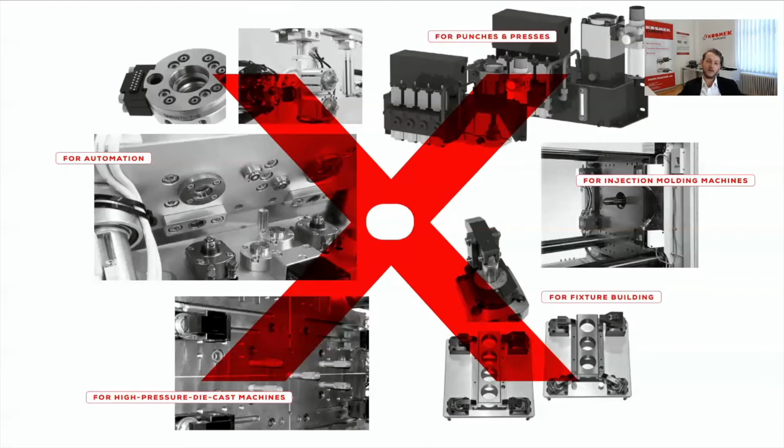For that, I want to start with a short overview of the different types and areas where the ejector couplers are used. So here we have a short overview regarding the injection molding area, ejector couplers and rods, and in terms of die casting. As you can see in the injection molding area, we have the possibility to use the ejector rods, and additionally, of course, the ejector couplers, which connect the ejector rods and the ejector platen. In addition to those two components, we have the center pullback, the PMD, which also connects the ejector plate to the couplers and to the rods.

In terms of the die casting area, we have two different ejector coupler types. We have the spring-loaded, air-released ejector coupler, the PMF, with an additional action confirmation sensor. And we have the manual ejector coupler, the PMG, which is connected and disconnected from the ejector plate just by pressing this little manual switch on the back.

So it enables us to standardize the process or operation steps with the help of these ejector couplers and ejector rods just by a simple button operation on the machine. So you can reduce the operation time as well as the complete cycle time due to a faster connection and disconnection. And everything can be accomplished by a simple button operation without the risk of getting injured or a malfunction inside of the machine.

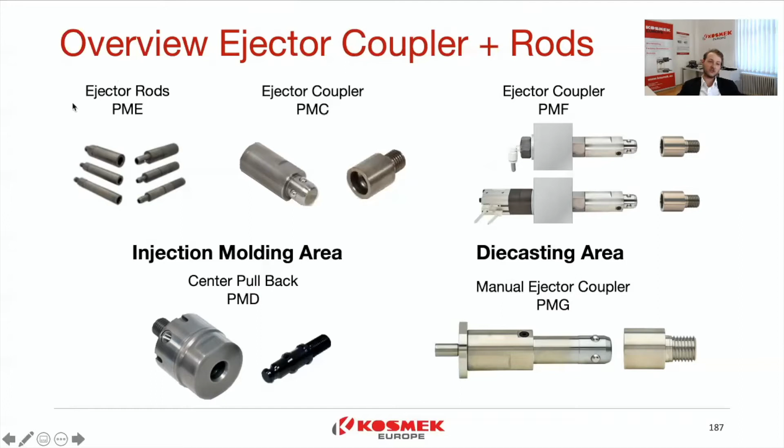And now let us start with the ejector rods, the PME for this webinar. The ejector rod itself has been divided into a base rod and an attachment rod. The reason for this is simplicity, ease of use, and speed when we are changing the ejector patterns. We don't need any more tools, which allows us to make changes in mere seconds.

The main benefits of using the PME manual ejector rods are that they are very easy to use. You just pull out the ejector rod and put it back in to arrange the new ejector pattern. There are no more tools required for changing the ejector patterns. And since they are light and safe, they are highly reliable due to the simple structure and the simple design of these manual ejector rods.

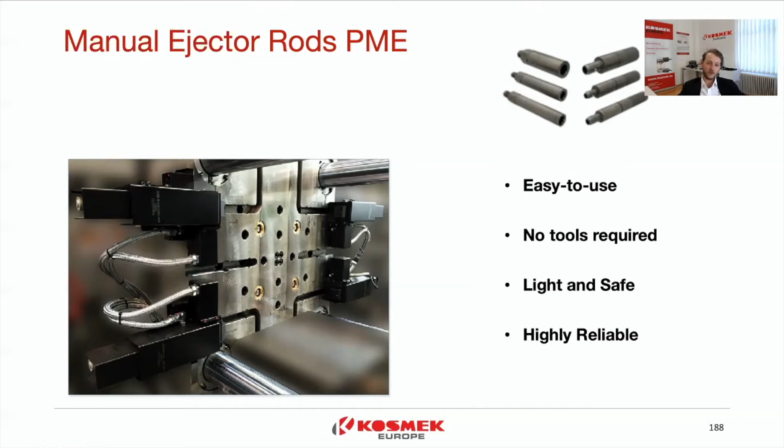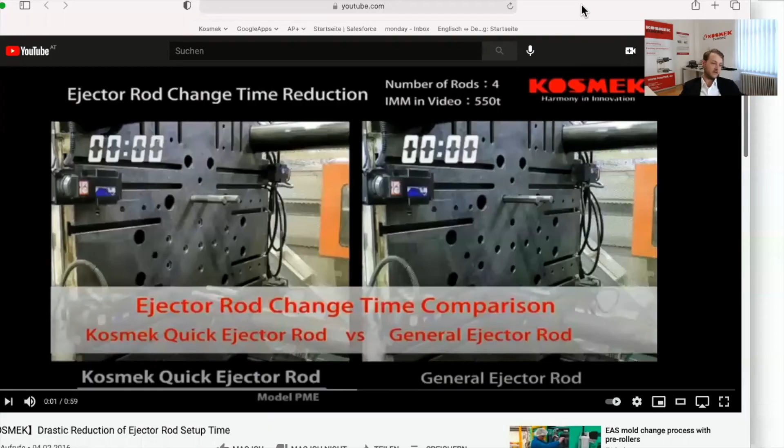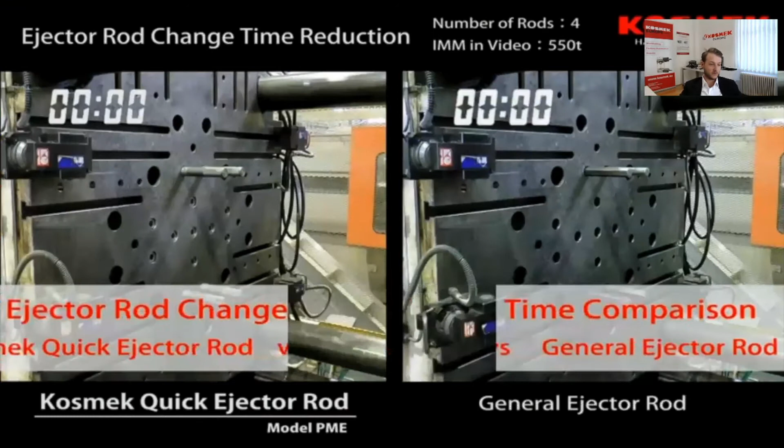And now let us have a look at this application example on how fast we are able to reduce the setup times, or the ejector rod pattern time, with the help of Kosmek ejector rods. You can see here the setup for this ejector rod change. As we have already started, we are seeing how fast the Kosmek quick ejector rod pattern is changed. We only need 7 seconds.

And as we can see on the other side, for a general rod, we need to unscrew it with the hex driver. Then we need to screw it out by hand. And once more, we need to lock it with the hex driver. So we need at least 2 minutes and 31 seconds to complete the ejector pattern setup, whereas you just need 10 seconds without any tools, which can be done with just a single-hand operation by your operator.

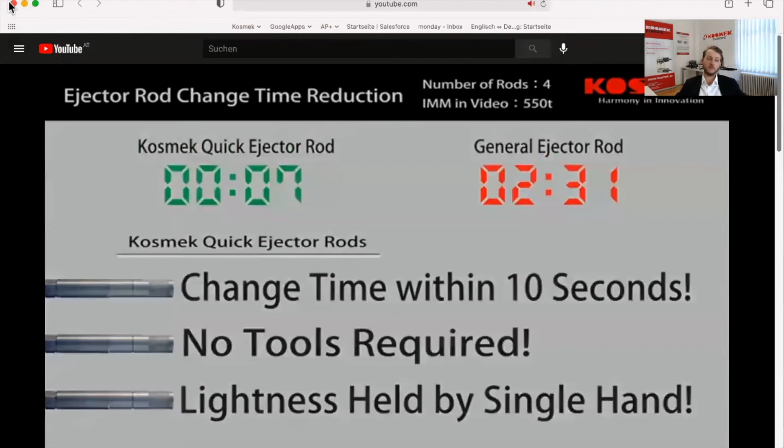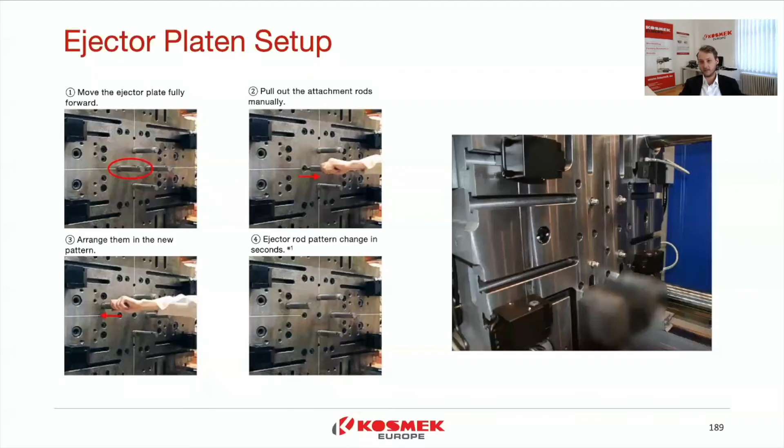Now coming back to the webinar. The reason we talked about the ejector rods first is because the ejector rods are connected by the ejector couplers to the ejector plate. So now we're coming to the ejector couplers, the PMCs for injection molding machines. It connects the ejector platen and the ejector rods just by a simple button operation.

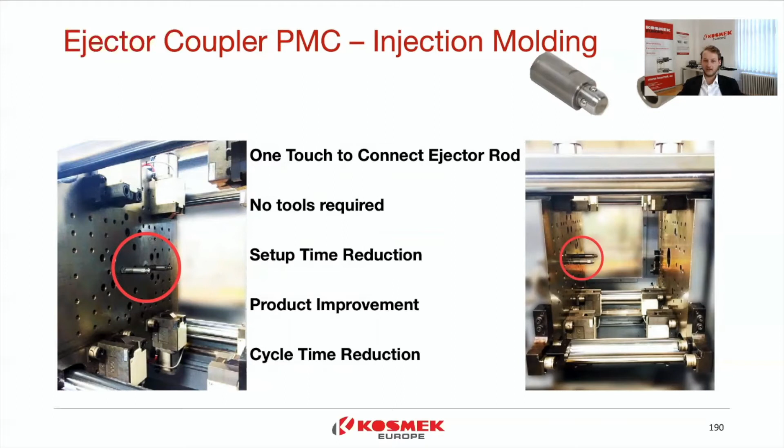We do not need any more tools to connect them, which results in setup time reduction and product improvement due to a more stable clamping of the ejector rods, which also results, of course, in cycle time reduction with the help of our ejector couplers. For the ejector couplers, I want to have a short look at our website and go a little bit more into detail on how the Kosmek website works.

So here we can see the landing page of the ejector couplers, and how we get to this landing page. Let's start in the home menu of the Kosmek website. Here you can search by keyword. You just type in PMC. Here you have the result for it. Click on it, and we are in the product information page.

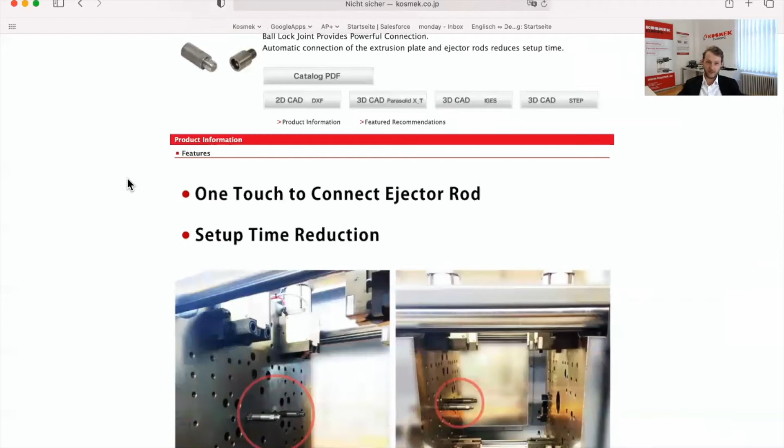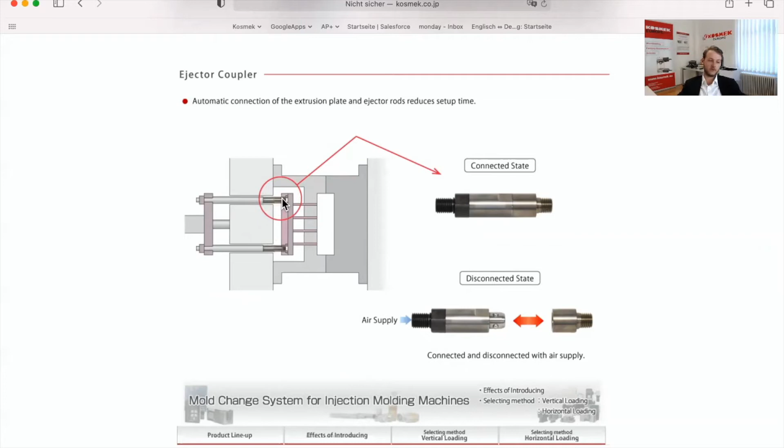So once more, we have one touch to connect the ejector rods to the couplers, which results in a setup time reduction. Here you can see the automatic connection of the couplers, which are mounted here. And here is the ejector plate and the ejector rods, which are connected just by simply coming together. And for that, let us have a quick look at the catalog, which we can just open here on our website.

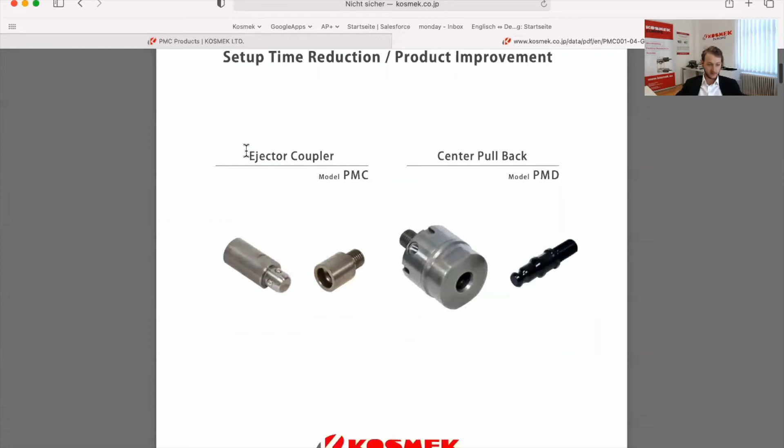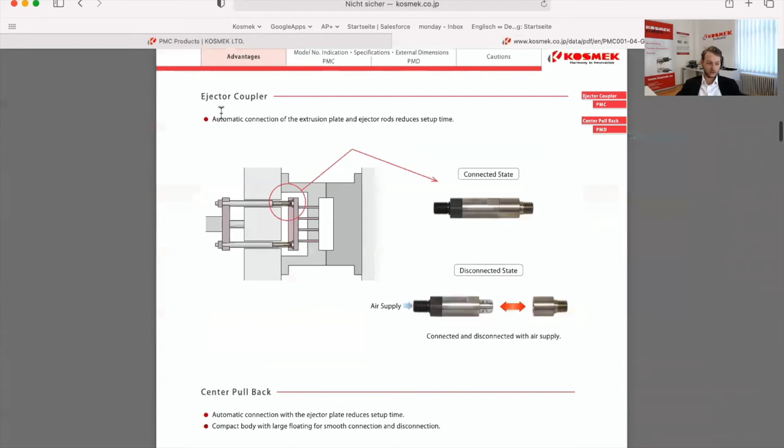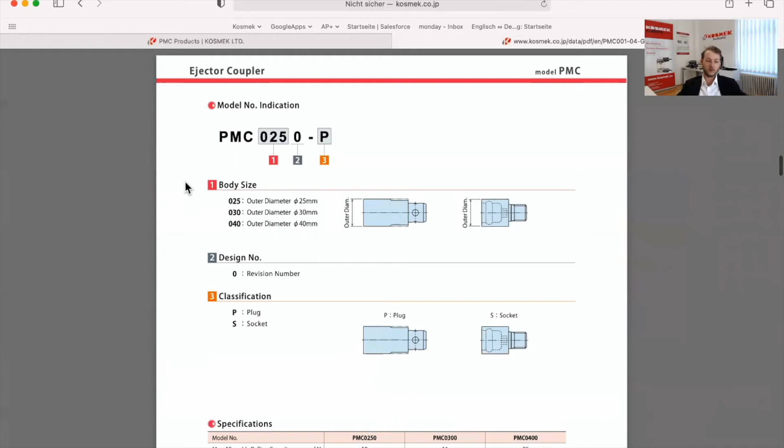So, ejector couplers and center pullback. Center pullback we will cover after this little check of the catalogs. Let me make it a bit smaller. So here you can see the catalog page for our injection molding ejector couplers and the center pullback. We're able to check here the different parts, the different connection methods, the different benefits these products can offer. And here we can see the right model number indication for these components, some external dimensions of these components,

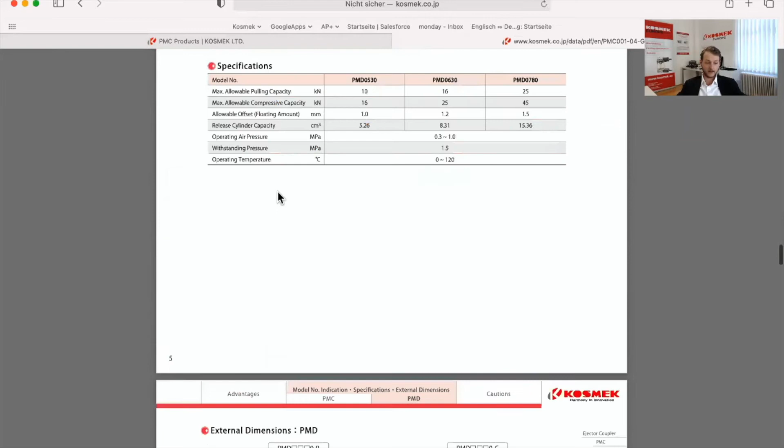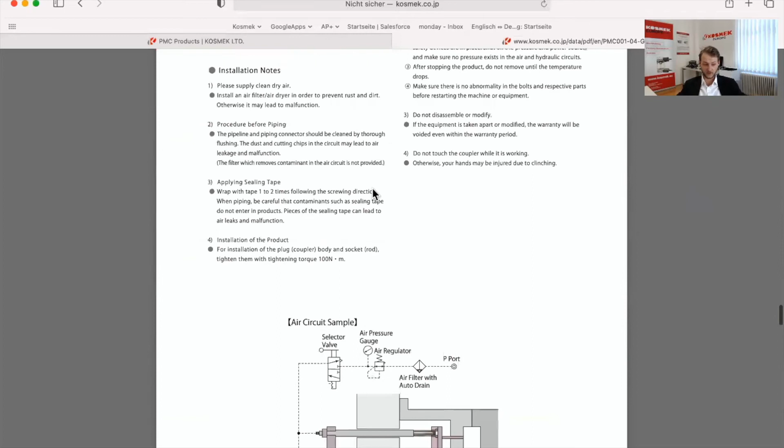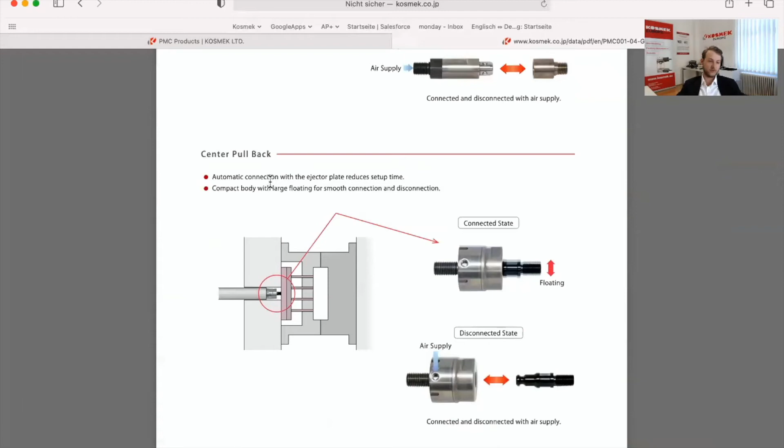which accessories are available, and of course some information on how to work with them, how to do the maintenance, and how the warranty works. All that you can simply check on our website, and you find everything basically in the catalog itself. And if you need help with the right model number indication, please feel free to come to us and we will check together with you the right specification for your ejector couplers, or in this case, center pullback.

And for the center pullback, let us have a short introduction to this product. It is used to automatically connect to the ejector plate or extrusion plate, which allows you to reduce the setup times drastically. The compact body enables you to reduce additional weight, and plus with the floating function of the component, we are able to smoothly connect and disconnect the extrusion plates, the ejector couplers, and the ejector rods.

The smooth floating function also enables you to overcome slight tolerance changes, so that no malfunction or damage is happening while we are connecting the ejector plates and ejector rods. This means you are more free when designing the ejector plate, or the C plate in terms of die casting machines.

So which type is floating? When we are in a connected state, you can see here the pull bolt, which is connected to the center pullback main body. This pull bolt is attached to the ejector plate. Once we are connecting the ejector plate to the center pullback, we have a slight floating function which allows us to overcome slight tolerance changes, and with that we are able to smoothly connect or unconnect the ejector plates.

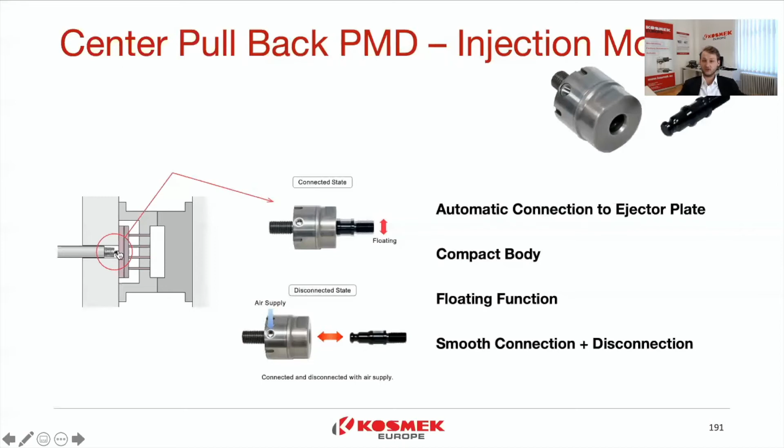And for the center pullback, we also have already seen the catalog and how we get to the catalog based on our website. Now we want to change to the die casting area, and first with the ejector couplers, the PMF. So once more, we divided these parts into two parts, the main body and the plug or socket side, as we call it.

This type is released by air pressure and is getting locked by a spring. This means when supplying pressure, the steel balls, which we can see here, go back inside the main body and can move freely since the piston is getting pushed back.

When we are back in the position, so we are on top of this and are right at the time to connect these couplers, we stop supplying the pressure to the release port, and the internal spring pushes the piston forth, and therefore the steel balls are getting pushed out and pushed inside of this tapered or straight surface.

So once more, the benefits are it is easy to use. We do not need any more tools for changing. It is light and safe. Due to the simple structure, it is highly reliable, and we are able to use a single button operation outside of the machine for connecting and unconnecting.

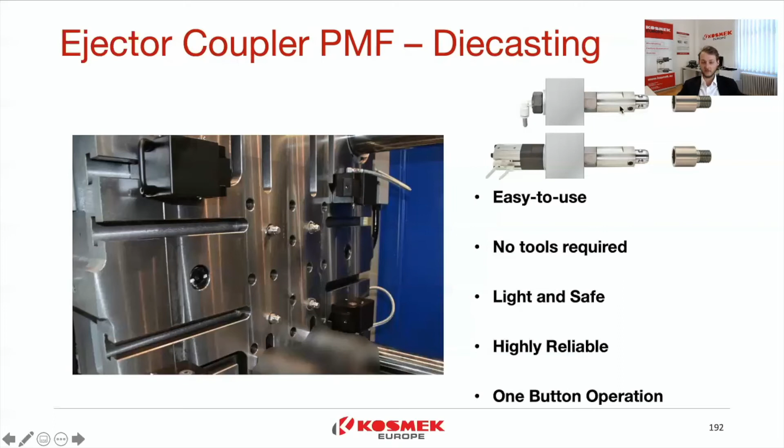So to get a little bit deeper into how this is connected and how this works, I want to show you the following cut view. As we can see here, since we divided the rods and couplers into two parts, the socket and the plug side, we are able to connect even more easily than with general ejector units. Now let us have a look at how this is accomplished.

When supplying pressure, the steel balls are free to move, since, as we can see here, the piston is getting pushed out. The steel balls are inside of these surfaces, so they can move flexibly, and we can unlock, or we can release the socket side from the plug side.

If we stop supplying pressure, this internal spring is pushing the piston back, and at the plug side, we can see here, we have a small surface which is straight in this case. So here we have the straight surface.

The piston is getting pushed back, the steel balls are getting pressed into these straight surfaces, which generates high forces so that we are safe against disconnection due to higher forces. This means we have a more secure connection to the extrusion or the ejector plate, and therefore we are able to be safely connected.

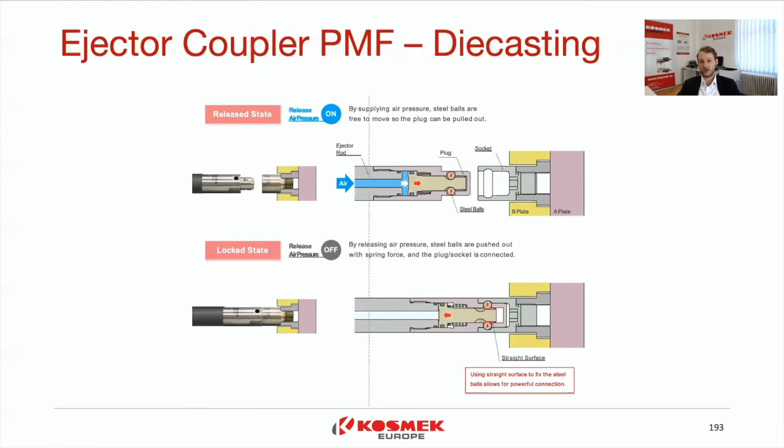Now, coming from the ejector coupler, the PMF, to the manual ejector coupler, the PMG, which is fairly new in the range of Kosmek. With the help of these manual ejector couplers, you are able to connect ejector rods and the ejector platen once more, but now with a simple push onto this manual switch back here. Here we are able to reduce the complete setup time by about a half with the help of these manual ejector couplers. For better understanding, once more, let us have a look at the website.

So here, as we already have encountered, if you're at the home screen of the Kosmek website, you just type in PMG for manual ejector couplers, you get the result, you click onto the result, and you are on this page. So it is able to reduce the setup times in half. So let us have a look at the current method.

In general, the ejector rods and the ejector plate are connected by a double nut, but this takes a lot of time to tighten and untighten to change the ejector plate. Now, with our manual ejector coupler, it enables a one-touch connection of the ejector rod and the plate with the help of this manual switch.

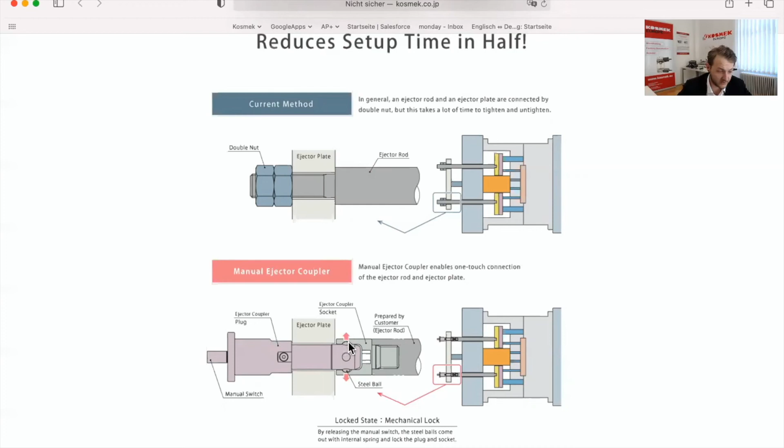When we are pressing the switch, the steel balls are getting back into the main body and are free to move. Once we let the manual switch out, the steel balls are getting pushed outside due to the internal spring inside, and we're able to connect or disconnect just with this manual switch operation on the manual ejector coupler.

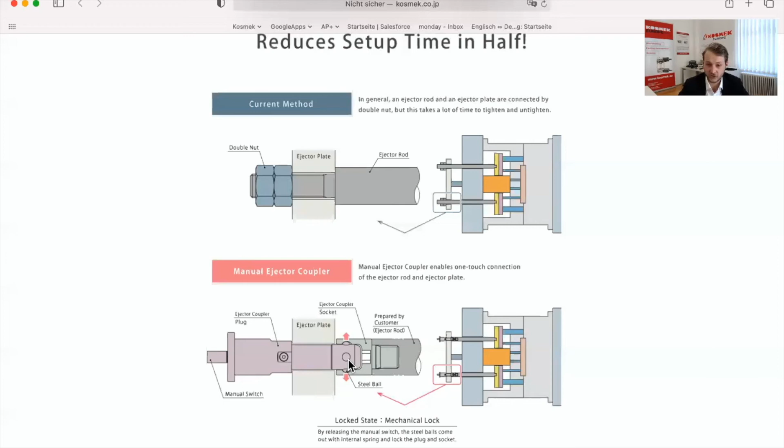So by pushing the manual switch, the steel balls become free to move, so it's able to pull out the plug, as I already have told you. So here we can see this part of the ejector rod. It is connected to the mold side via the ejector rod. So the mold side needs no modification at all when using the manual ejector couplers from Kosmek.

And additionally, you also can see here the featured recommendations. If you, let's say, equip a die cast machine, maybe you need a core pull or core push cylinder for a faster cycle time for each shot. So you also get here some of the recommendations of what Kosmek can do.

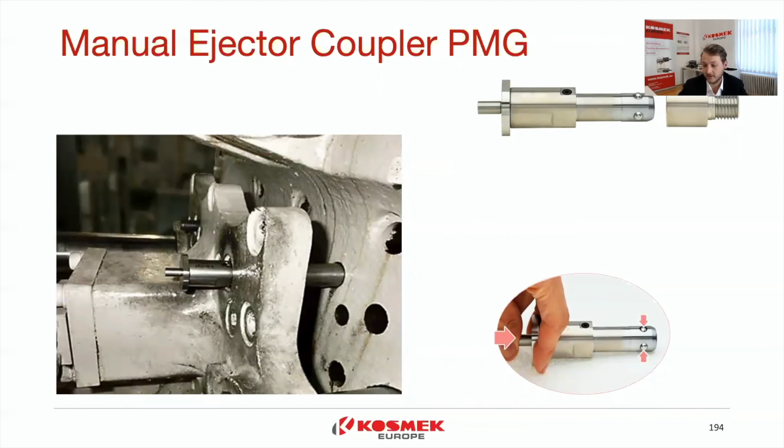And with the help of Kosmek, you just push one button and everything starts to release or to lock, and you're able to take out or set up the new mold or workpiece, which means you can improve the work efficiency of die casting or injection molding machines. You can reduce complete operations or setup times.

It enables the operator a more secure operation, and you're able to standardize the operation due to a single button operation. And everything will be locked with the needed forces, and no malfunction or injuries can happen due to bad working conditions.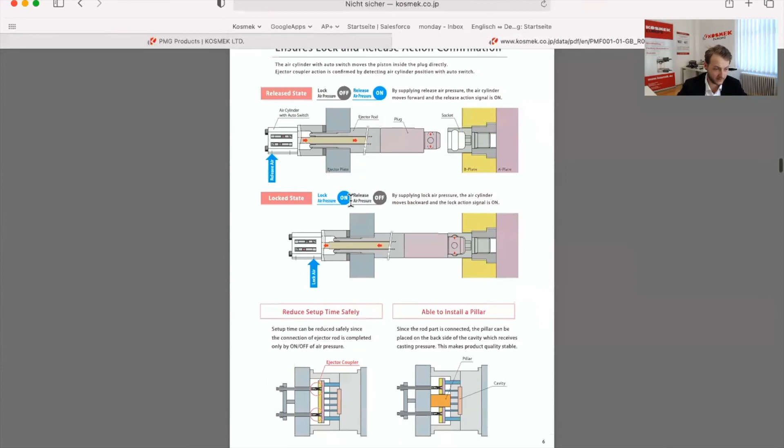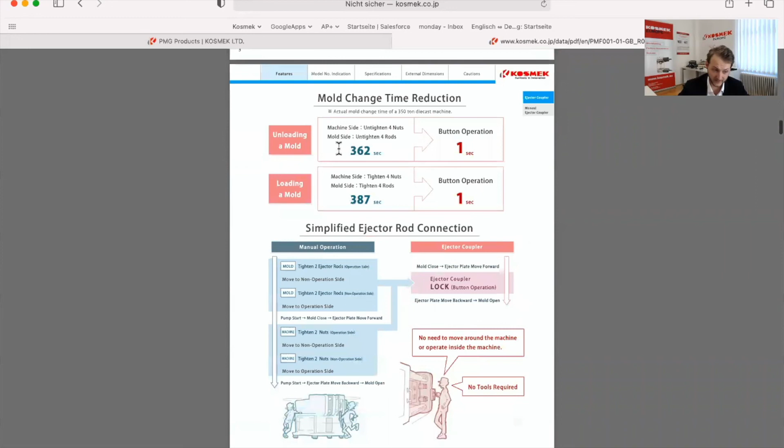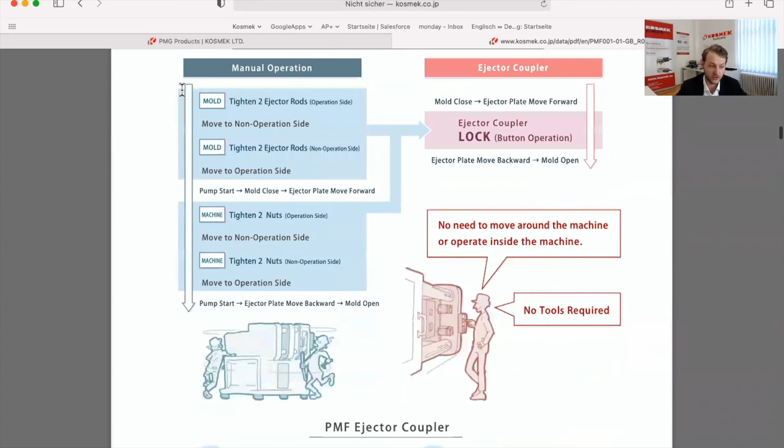And here you can see how we are simplifying these complete connections. For the manual operation, you need to tighten the ejector rods, you need to tighten the nuts of the machine, and then you can start moving the ejector plate backward and opening. Now, with simple button operation, it takes 1 second to disconnect or connect the ejector plate, and therefore we can reduce the complete setup times and cycle times with the help of the ejector couplers from Kosmek.